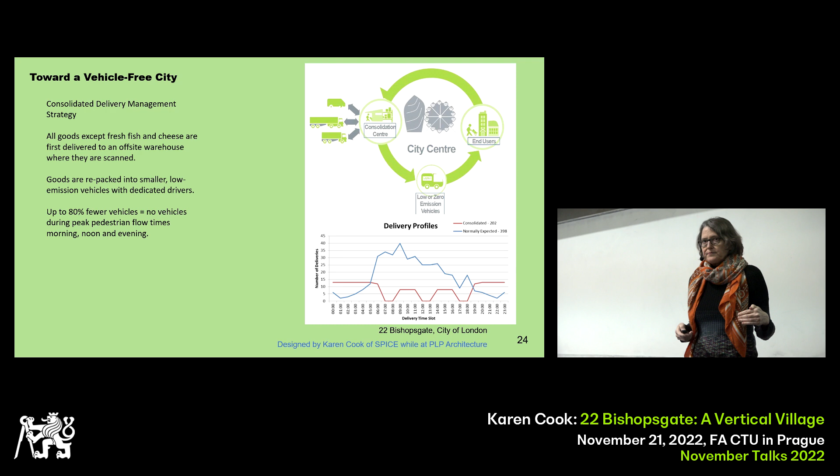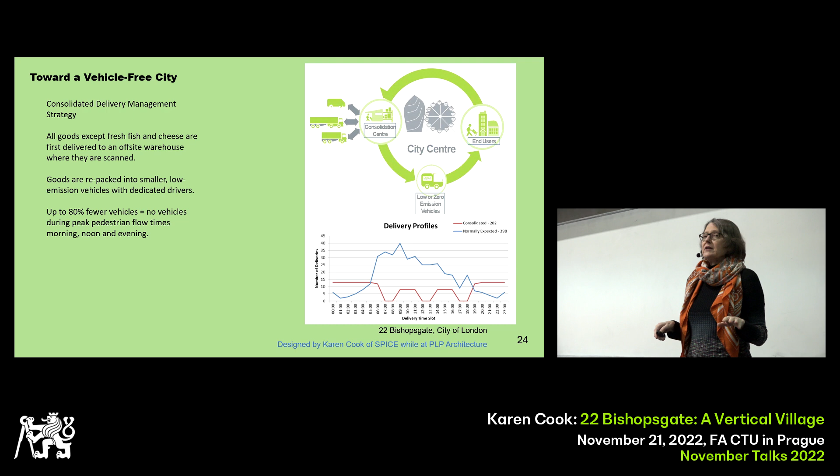Tenants also have the option to store their goods at the warehouse and then ask for them on demand, so that instead of paying for storage space in the building, they can use the storage space at the warehouse. So this has reduced trips to the building by up to 80%, which means that we can deliver all the needs that the building has outside of pedestrian commuter hours, and from breakfast commute, lunch commute, and evening commute, there are no vehicle trips to the building at all. They're completely suppressed.

I mentioned wind. Wind is always an issue for a tall building. It's usually considered for the stability structure, because the more wind is diverted around the building, the less work there is on the structure, and the less weight the structure has, and the more economical the building is. We also have to test the building in London for wind, for pedestrian comfort. And I would urge you to consider this before you design the shape of the building and not after. But anyway, the rule is in the City of London that we mustn't make the wind conditions any worse than they already are, and ideally improve them if possible.

And so we worked with engineers at the wind tunnel. We also worked with automotive sport engineers, and the advantage that they offer is very sophisticated computational fluid dynamic analysis. Their computers are a lot more powerful than a mechanical engineer's computer. And the CFD analysis could show what the possible problems would be and the probable cause, because they can work backwards and find the vector point where there's a problem and then propose solutions that we could then test in the wind tunnel. So there was this iterative back and forth process, which was resulting in a very basic solution, which was a very large canopy. The canopy is situated at about 16 or 17 meters above the street level.

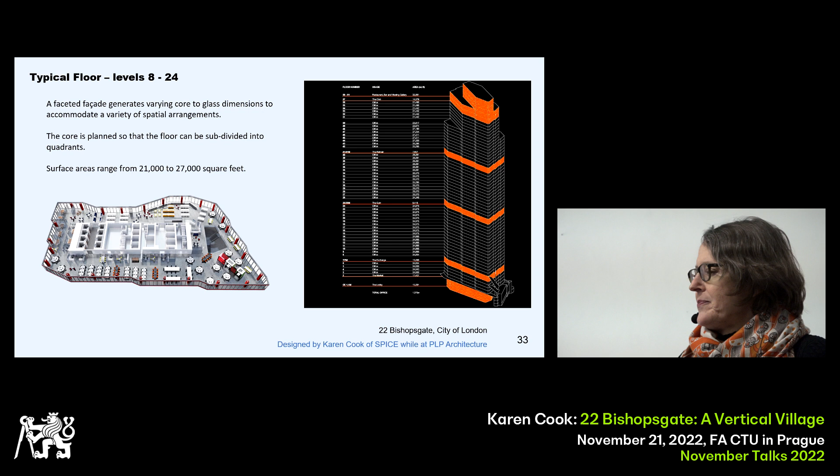When you see the building stepping, the idea is that it's joining together, as Irene was describing, the other tall buildings and trying to pull them into a single cluster. And I should mention there are still some more tall buildings along the way, which will again start to fill in the few gaps that remain, so that it will read as a coherent skyline with a peak at the center.

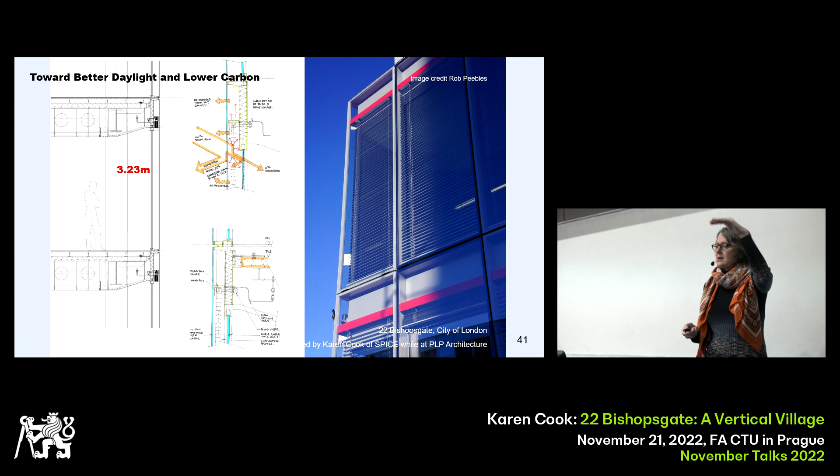And then we stepped the ceiling higher at the facade perimeter in order to gain even a little bit more daylight. In London, they don't measure the daylight on the floor as they do here. So there isn't yet this measured awareness of daylight, but I think it's coming. It will become more important.

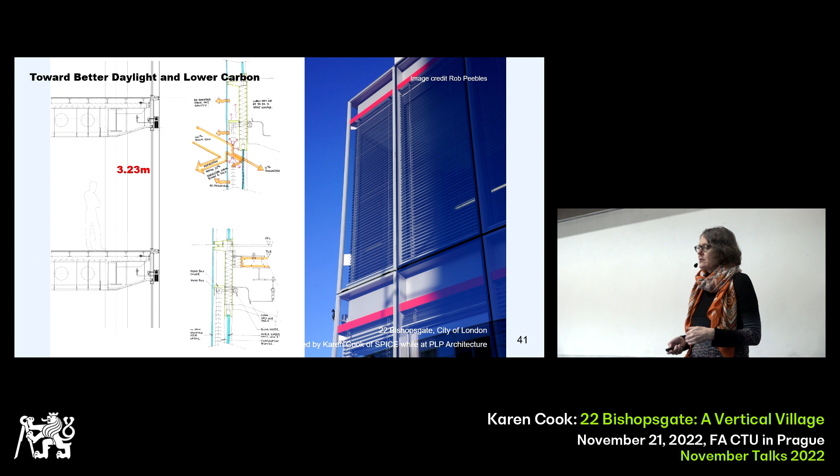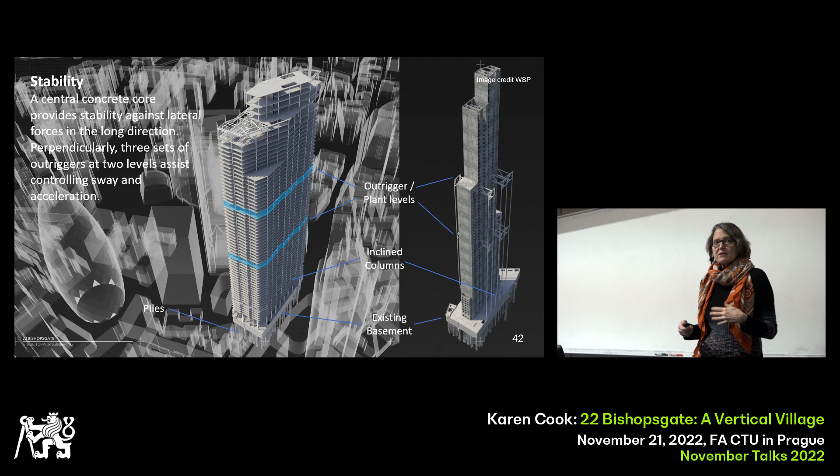I mentioned the structure. The stability structure is critical in a tall building. The concrete core does a lot of the work, which means that the steel can weigh less, can do less work, and the outriggers at levels 25 and 41 further stiffen the building because the wind is trying to push it sideways. This building is 40% larger than the Pinnacle design which preceded it, but the steel is 15% less weight. That gives you an idea of the effectiveness of the stability structure.

The core was what you call jump formed, meaning they built a formwork around the shape of the core, and then they slid that formwork, or they jacked that formwork up. And actually, because the core was so large, there were two of those, and they went at different speeds. And that leaves a much smoother finish than you would have if you disassembled and reassembled the formwork every time.

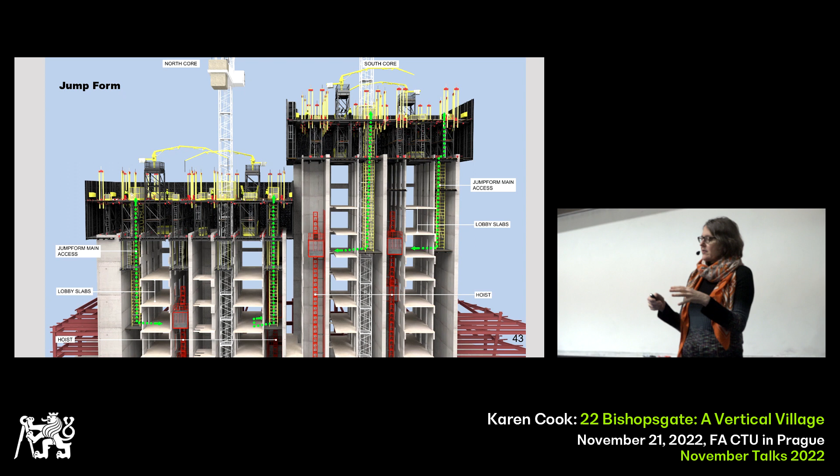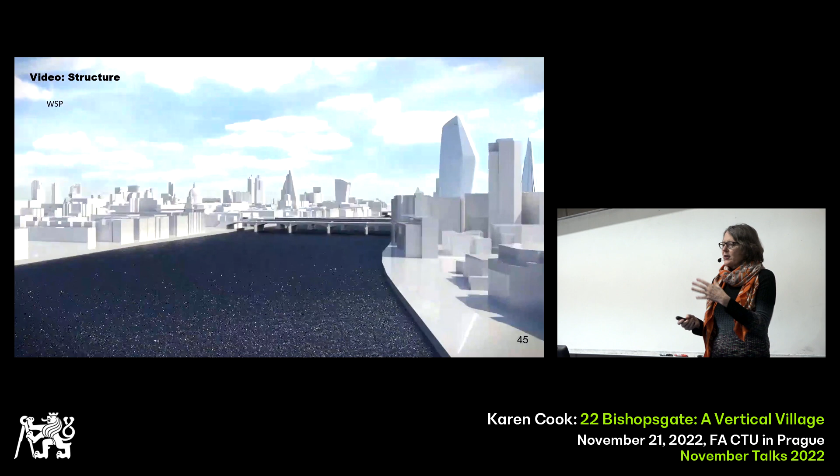The main objective of the structure was to reuse the foundations which were built for the Pinnacle Tower, which meant that we had some columns that didn't come down straight. They had to walk their way to the earlier foundations. And that was quite challenging during the construction of the building. This is just a quick video that the structural engineer WSP made to illustrate what they had to do.

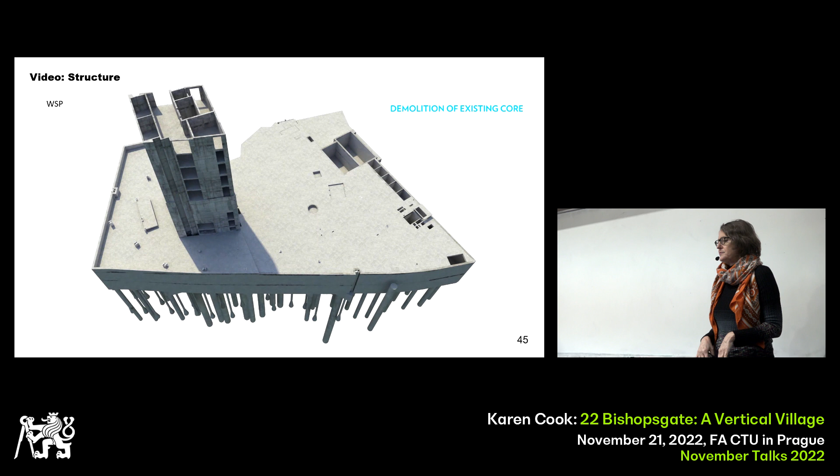So the Pinnacle design was built up to the 9th floor of the core, which you see here. And the foundations were built, so they're piles that are 65 meters deep into the Thanet Sands. And we kept the piles, obviously, and we kept the lower basement. We kept the ground floor slab, but underneath that, we removed some of the slab in order to stiffen the raft, or build more raft, and to add more piles.

And the new piles were added by rigs that went into the basement so that it would reduce noise and irritation to the neighbors. There's a medieval church from the 12th century right next to the site, which is very active. It has service every day. So it was very important to them that we reduce the noise, particularly during the service. So this shows the piles that were there on the site and then the new piles that were added. So it's a lot of piles now.

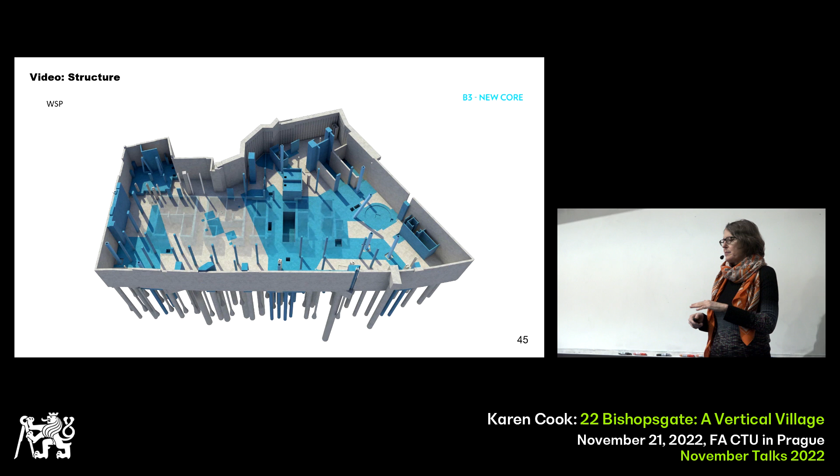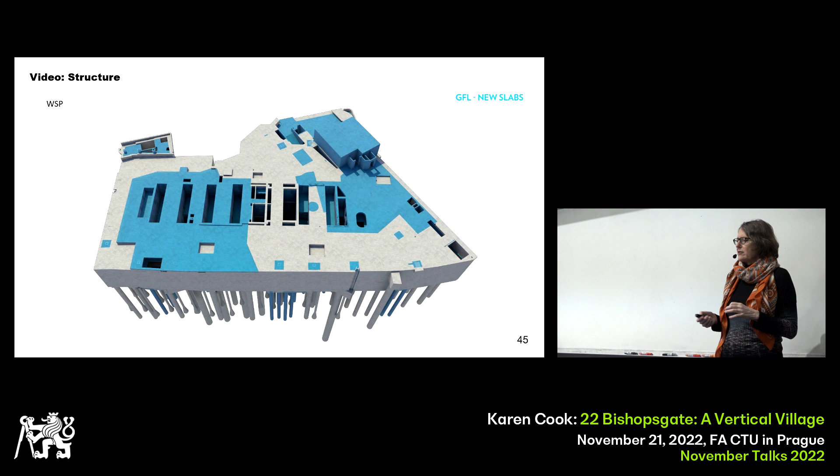So the blue areas are where we had to add additional raft in order to stiffen the foundation to handle the new core above and to strengthen the new concrete core above. On the ground floor, most of the structure was retained. Most of the horizontal structure was retained, which again reduced the irritation to commuters on the street.

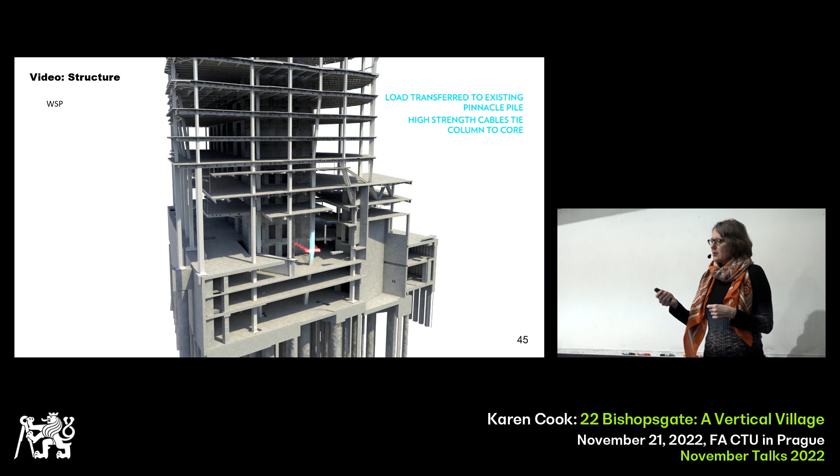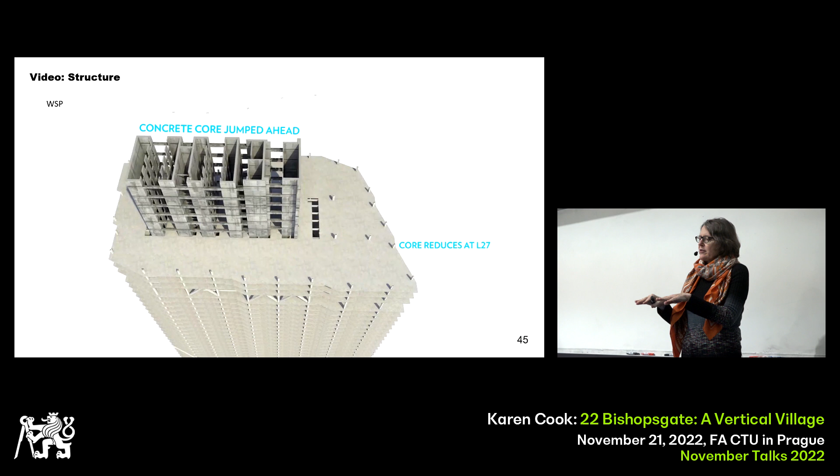This shows the columns that had to change direction as they came down from the ideal location above into the required location in the floor. And then these show the floor plates being added as they follow behind the core as it was being poured upward. I think one of the most challenging aspects.

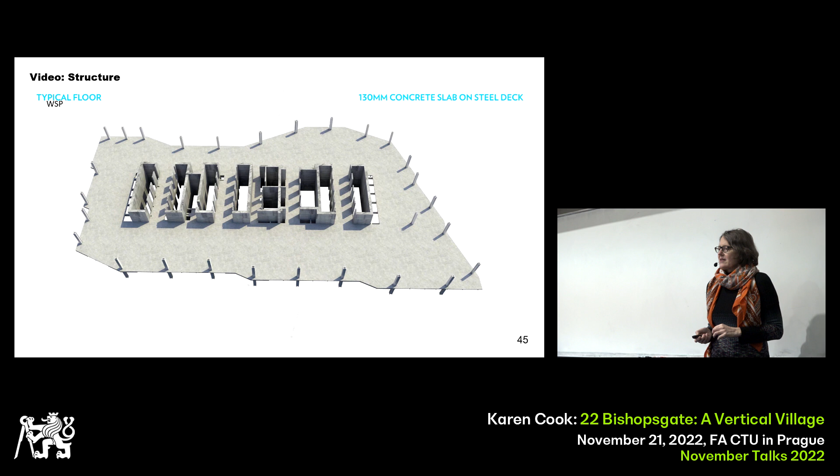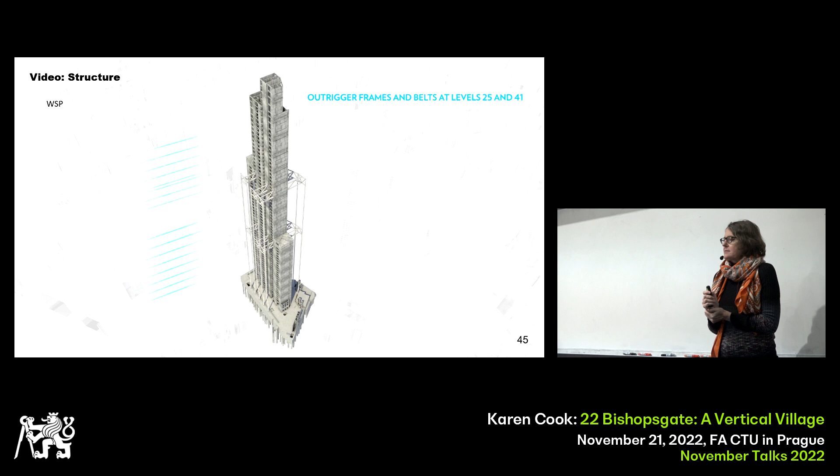Sorry, this shows the outriggers. The outriggers reduce the sway of the building. So even with the outriggers, there's still 600 millimeters of sway at the top in the most extreme wind conditions, which don't happen very often. I mean, that would be in a storm situation, for example.

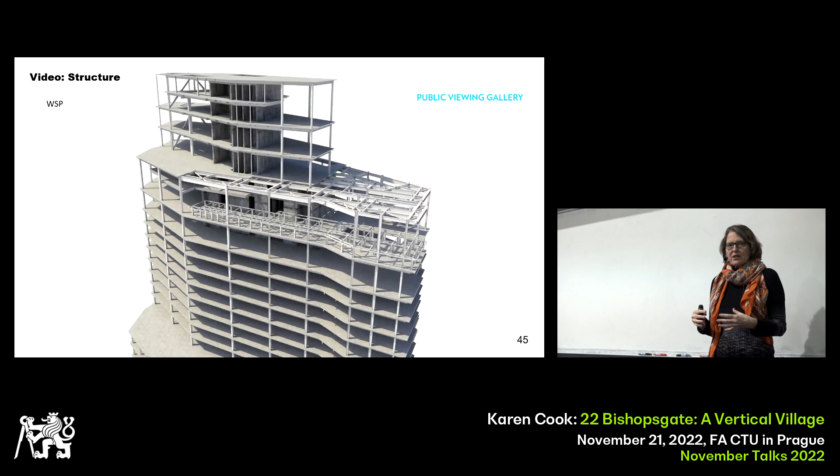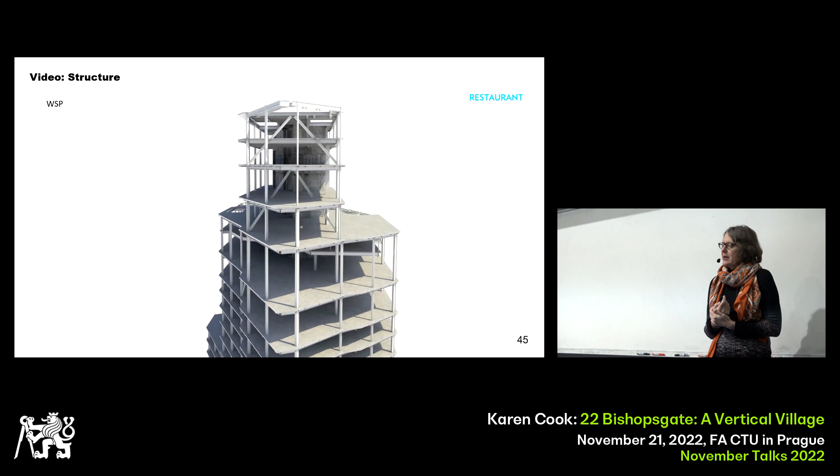And the shape of the belt truss around the outriggers is not very pretty, in the sense that if you were doing a new building from scratch and putting your foundations where you wanted them, you could organize it more geometrically perfectly. At the top, you're looking here at the top of the building where the public access floors are located. Okay.

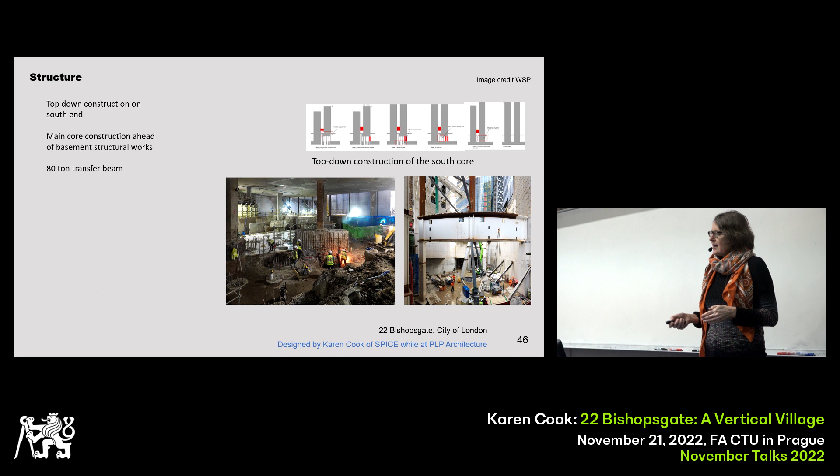One of the most challenging aspects was how to stiffen the southeast corner of the building, where there was a lot of new mass above and not enough foundation. And so you're looking at a 3-meter deep beam that transfers some of the structure. And there were column pile caps that had to be dug out and reinforced as well. And there were columns that were actually not being held up by anything, while the core above was built to the 17th floor before those were put back. That was quite a tricky part.

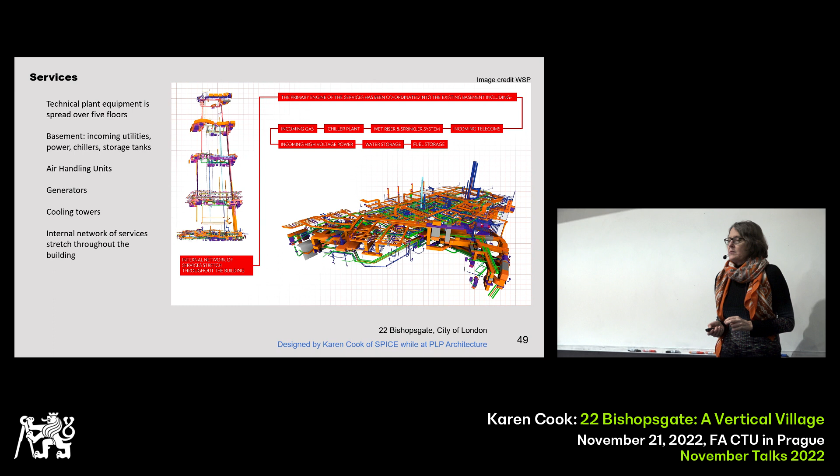The environmental services or the mechanical services were, I would say, maybe the more standard for the time period. I think there would be more innovation now. What was innovative were the technology, smart building platform controls. So I didn't mention, for example, when people arrive at the building, if you want, you can come in using your phone. You have an app on your phone, and you say you want to come in, and you basically can open the gate with your phone. If you're a visitor, you're sent a QR code.

Just as you're boarding a train, you can board the building. So in fact, the traditional reception isn't necessary unless someone doesn't like to use the phone, so there are people there to help you if you need.

The other big benefit of the technology is, of course, monitoring the equipment in the building. So monitoring the use of the building and monitoring failure, predicting failure. All of the tenants in the building have agreed to share a 3D model of their space. So there's a complete digital twin of the building, so not just the structure and the architecture, but all the internal fit out of all the tenant spaces as well.

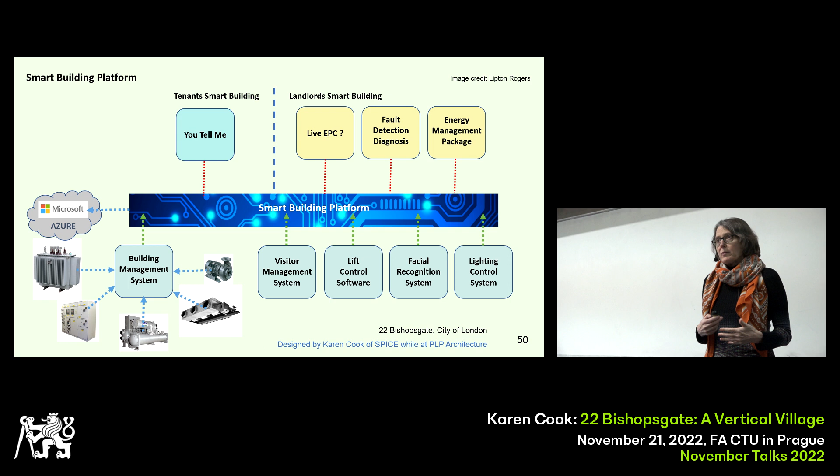The sensors in the building then tell the tenants where their space is not being fully used, and they can consider if they want to reconfigure their space to use all of it more, or if they want to keep it that way. And the idea of the predictive failure is to help the building management know when equipment is going to fail and order the components in advance and not need to wait until something breaks or wait until it's reported.

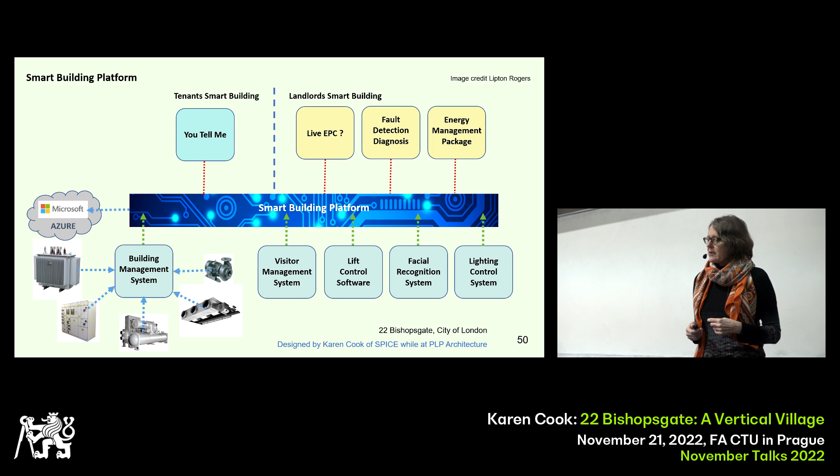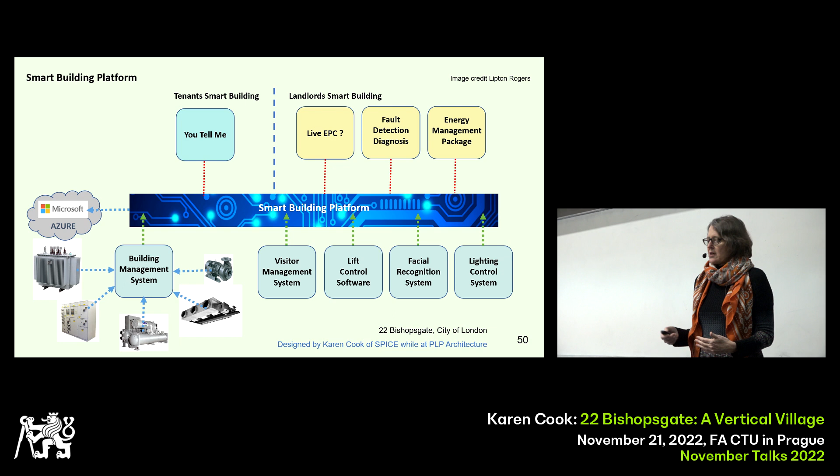And this saves, it was developed together with a technology company in the US who use that on their own campus, and they save 6 to 10% of energy year on year. So each year they make an additional energy saving by using this information.

So I think with regard to other technology, you're probably becoming used to it yourself. There's ubiquitous Wi-Fi everywhere. There's what they call blown fiber data. So instead of applying for a telephone line that you wait 3 months to get, there's a fiber which is blown through the building on your needs. And the building has a WiredScore of platinum.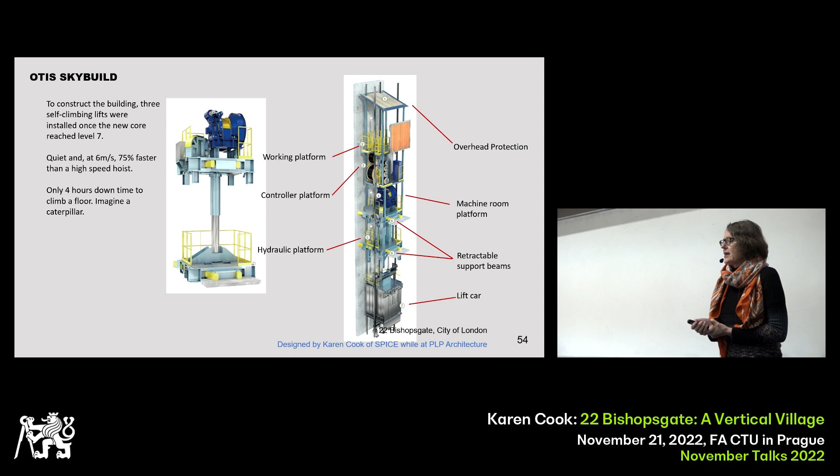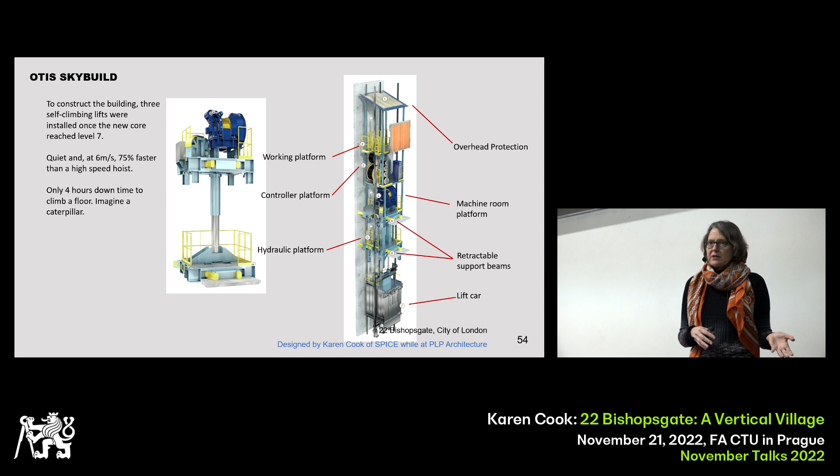The lifts also had something innovative about them, two things I should mention. They had what they call the Otis Skybuild. So normally when you build a building, you see this hoist and it's moving very slowly and it's very noisy. And on a tall building, it can make the timing of delivery for both the materials and the labor a real logistics nightmare. So Otis developed what they call the Skybuild.

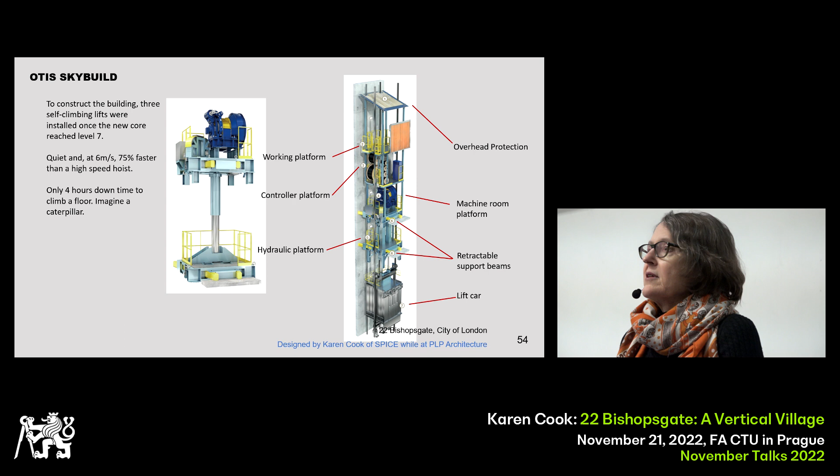Basically, the lift moves like a caterpillar by itself. So they can install the lifts instead of waiting for the concrete shafts to be built and then installing the lifts at the end of the construction project. They can install the lifts after just a few floors of shaft have been installed.

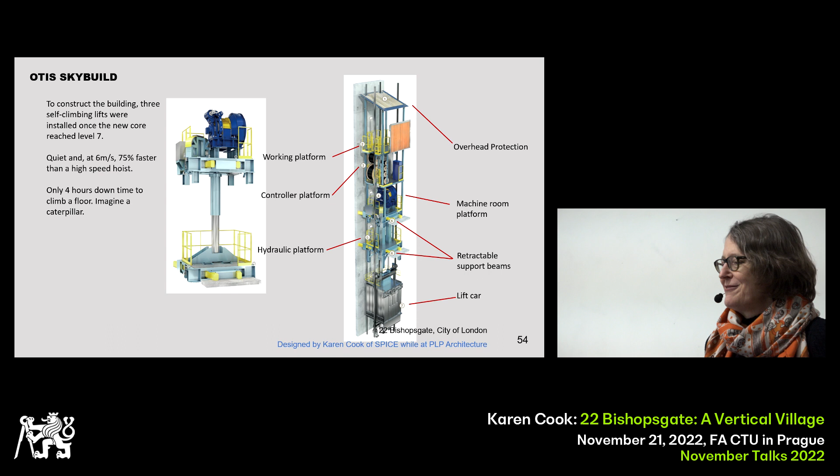And then as the building shaft grows taller, the lift can, within 4 hours, go from serving, for example, floors ground through 6. In 4 hours, it can climb to level 7 and then serve levels 1 through 7. And it's literally like a caterpillar. It sticks its arms into the concrete shaft and then climbs its way up. They have a video online you can watch if you're that interested. And the other aspect of the lifts, I'll let the video explain.

Oh, there's no sound. Okay.

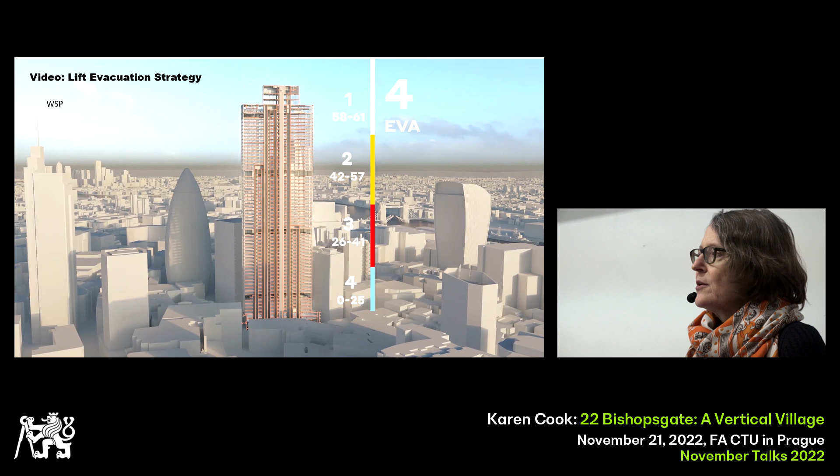Normally lifts are not used during a fire. But in this building, because there's public access at the top especially, there was a concern that people, elderly people or even fit people, wouldn't be able to get down 60 floors in an emergency. And so we worked with the fire department to come up with a way of using the passenger lifts for evacuating people during a fire.

And this is done by basically hardening the floor slabs above and below the transfer floors. So people do walk down to a transfer floor, but then they can take the lift down the rest of the way.

Sorry, normally there's an explanation that comes with the video. Let's skip ahead.

So it allows a much safer and faster evacuation, especially for people who are not fit.

but I think architecture has to deal with a lot of different constraints and a lot of different objectives, not only for the client, but also for the other stakeholders, the people who occupy the building or the people who live around the building as well. And it's a big effort for a lot of people, so thank you.